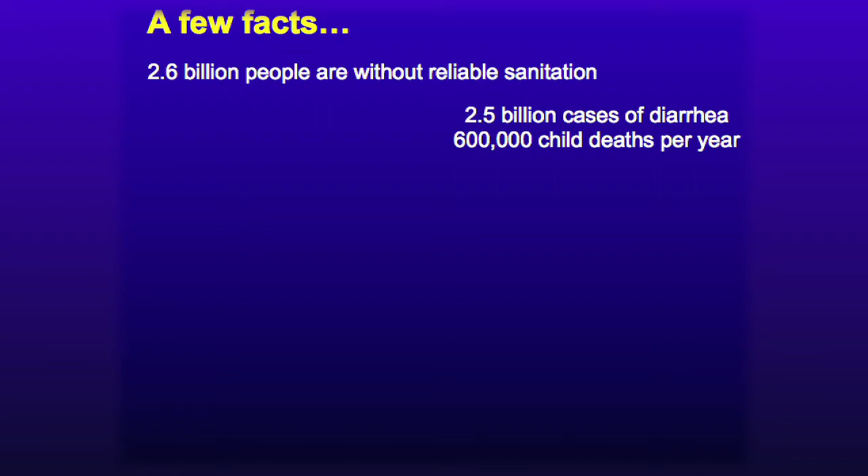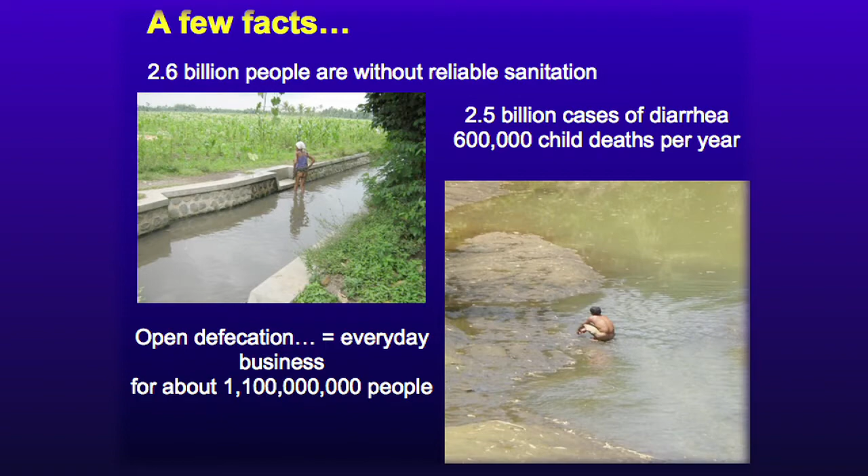All right. That is roughly 2 out of 7. And those standing would be representing the population that has no access to decent sanitation. That means you have no decent toilet to go to. And now I'm going to ask the fourth row to sit down. And the lucky ones in the second row have no toilet at all. That means that when nature calls, you have to go out in the bushes, you practice open defecation. And that's the reality for about 1 billion people on this planet. Over 40% of the population in India is practicing open defecation.

So now you can sit and relax. Everyone has nice toilets. And for the next 20 minutes, I'm going to tell you a little bit about the problem and about what we're doing, what kind of research we're doing in my lab and out in the field with graduate students, with undergraduate students, with researchers, and how we're trying to make a difference, how we're trying to solve this important problem.

It's a very important problem in the sense that it has a huge environmental and health cost. As you can see on my slide there's over 2 billion cases of diarrheal diseases each year caused by this eternal cycle of pathogen release from fecal matter and being ingested. It has a big cost on children. Over 600,000 children die each year from diarrheal disease.

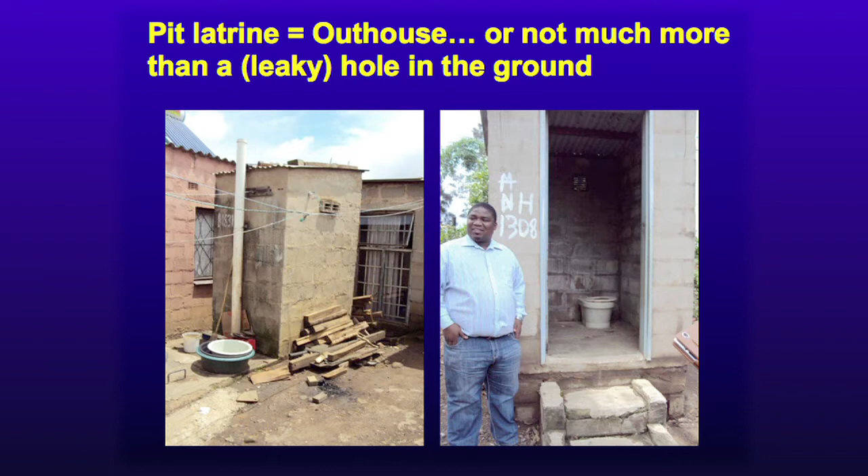When you have access to some sanitation, well, it could be something like pit latrines. And these are pictures I took in South Africa in a middle-class neighborhood, and this is kind of an inner court with multiple houses, and this is their pit latrine. It's the outhouse, and you can see here they're actually cleaning the dishes. The toilet is actually quite clean, but all the waste goes into a hole, and we're going to zoom in on this area here, which is where the waste is being received.

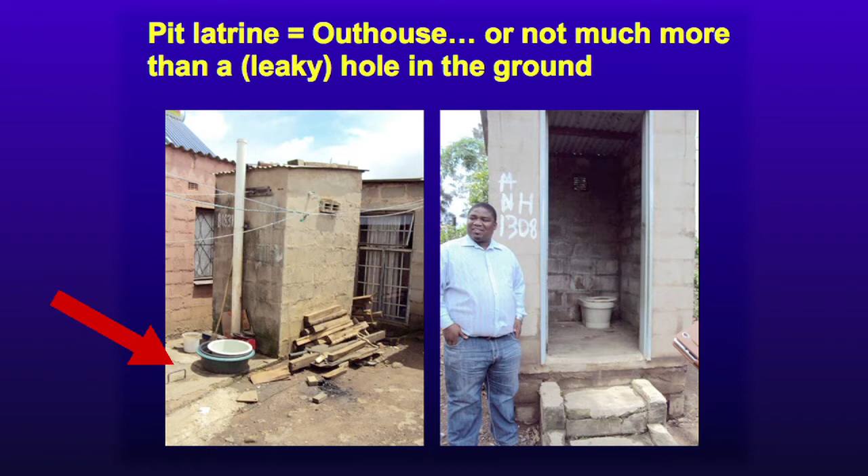And so what do you do when the pit is full? Well, that's all the waste here, and there are people whose business is to go and take the waste out and dump it somewhere. Often the work is done manually with buckets, and they're carrying those through the houses into the street, into narrow streets, and putting it in big drums and moving them. And of course it spills, it stinks, it's filthy, it attracts flies, and really spreads pathogens which are then going to infect people.

It's really intolerable. Really here, the Gates Foundation, led by Bill and Melinda Gates, and you might know that Melinda is an alumna from Duke, has championed a program which is looking at this problem and trying to find solutions. It's called the Reinvent the Toilet program, and I'm lucky enough to have 2 grants from the foundation, and we're funding graduate student, undergraduate student researchers to find solutions to this problem.

What they said is that it's not conceivable that for these 2 billion people, we have flush toilets the same way we have it in the United States or in developed countries, because there's just not enough water for having flush toilets for everyone. It consumes too much energy, and there's a need for too much infrastructure to have kind of the sewer and sanitation systems that we have in developed countries. So let's reinvent the toilet.

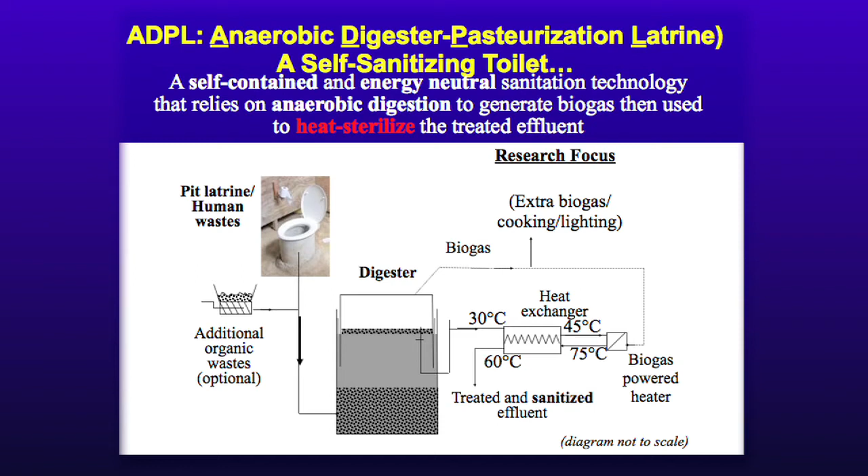And what we're doing is we are burning the biogas in a very efficient heater and heat exchanger system that we designed, and that allows us to take the effluent waste and bring it to temperatures where the pathogens are killed. So we're pasteurizing the effluent. So a few pictures here of how it looks in the lab. This is our first prototype, designed out of plexiglass. We built it in-house. You can see some pipes for the waste in and out.

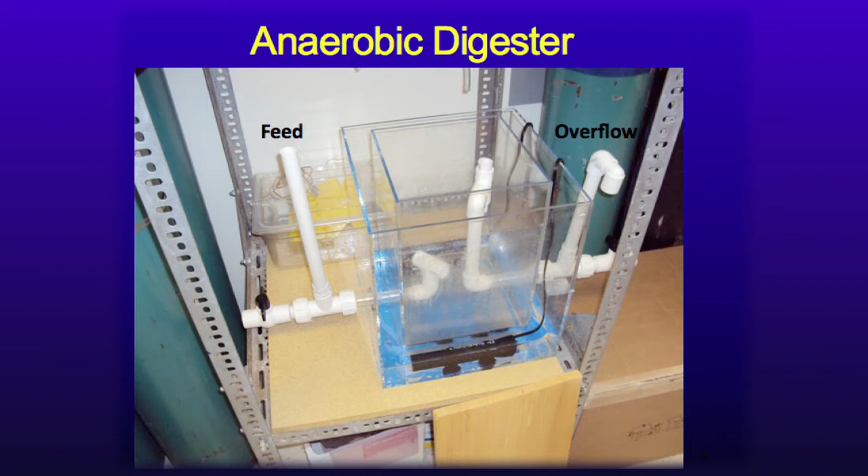It should be very simple. Remember that we're looking at populations that may be off the grid, so there's no moving parts. There's nothing sophisticated in there so that it can operate reliably. These are pictures of the digester as it is completed. This, by the way, is our synthetic poop. Always makes people laugh a lot, but it's a paste that has the same properties as fecal matter. It's a lot easier to work with that than with real waste in the lab. It's safer too. The biogas accumulates in the lid.

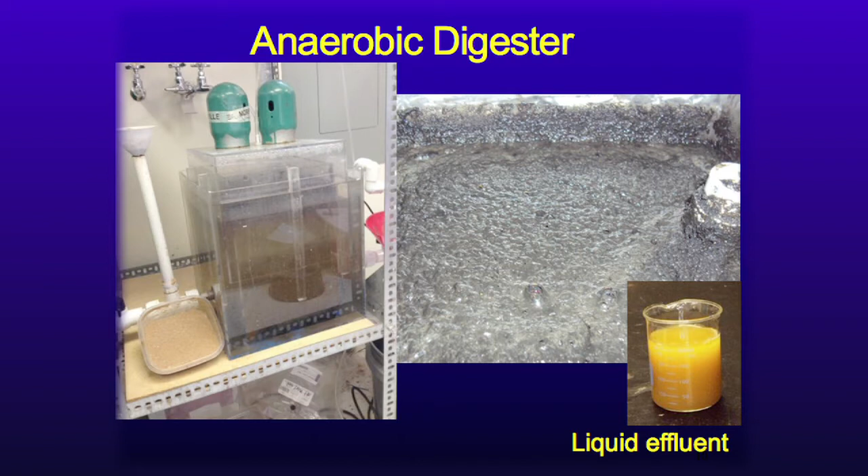This is a floating dome digester, just a little bit of jargon. Here you can see what the contents of the digester look like. You can see some gas bubbles. This is what comes out. This is the treated effluent. It's by no means clean water. We're not trying to make clean water. We're trying to make something that is safe. And this has gone through our heating system, has been pasteurized, and so we don't have parasitic eggs or viruses that are harmful. They've been killed over here.

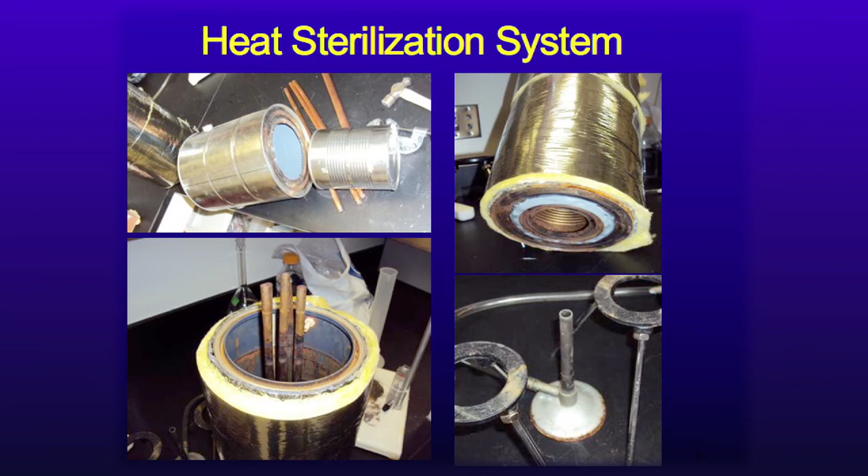You may be familiar with growing microorganisms on the plate. We're testing our heater and heat exchanger in the lab. We're feeding it some synthetic waste with bacteria, and you can see here we have 100 million in the inlet. Somewhere halfway through the system, we've killed a good portion of it, and what comes out is void of bacteria.

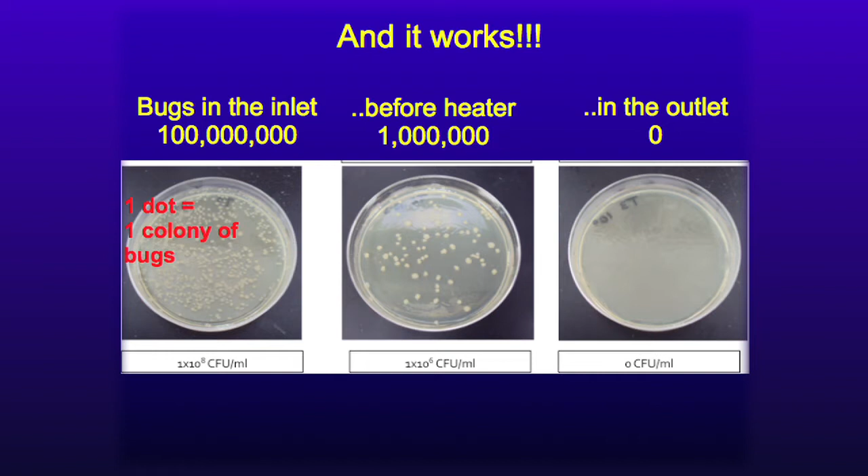So we're doing this kind of experiment to show it works and understand under which conditions it works and improve our understanding of the design and operation. We're moving these innovations to the field because this is where it's going to make a difference on the lives of people. And so last year, I had a graduate student spend the summer in Kenya.

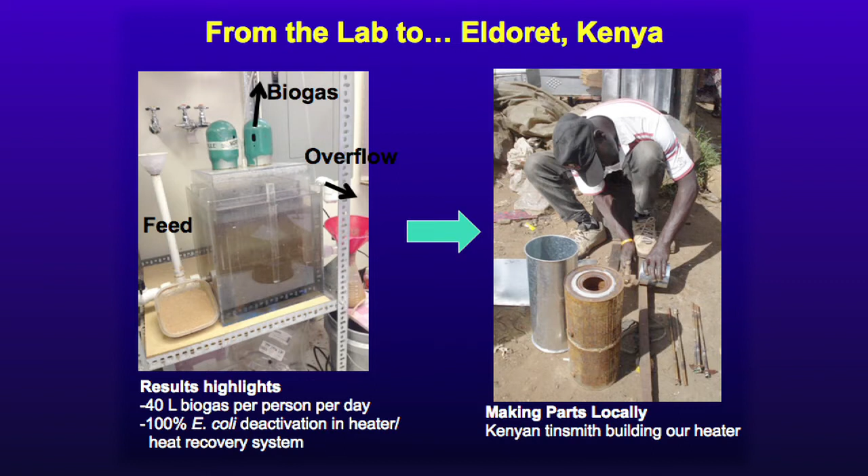And essentially, here you can see a tinsmith, which is replicating our system. This is the heater that I showed you earlier. We're building with local materials, we're building systems. And we built 3 such systems. The structure has elevated toilets. It has 3 toilets so that it gravity feeds into the digester. Here is a digester, and this is our heat exchanger, and this is the heater.

And so we have 3 locations that we're testing. We're educating the people who are using it, and we're acquiring data to see how well it works in the field. And what we found is that the people are very interested in those systems. They're excited about the biogas. They're excited about the possibility of having liquid effluent as fertilizer.

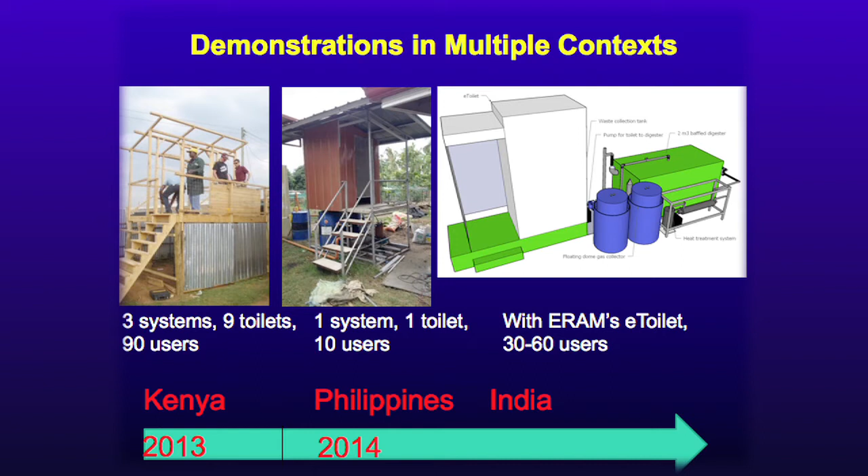And we're testing the systems in multiple contexts because the problem is so huge that we need to understand the spectrum of conditions for which it might be applied. So we have a partnership with some folks in the Philippines. And then we're also in India, and this is a CAD drawing of a system that we have there. We have partnered with a company that designs high-tech toilets that clean themselves, and then we're providing the treatment at the tail end.

And so you'll ask me, okay, where's the engineering in all that? What sort of things do we do with my students? So here are a few examples really quickly. This is the heat exchanger, and we are applying concepts of heat, momentum, and mass transfer to fully understand the flow of materials and the transfer of heat. And that allows us to optimize the design. And then we can size it, we can optimize the energy efficiency.

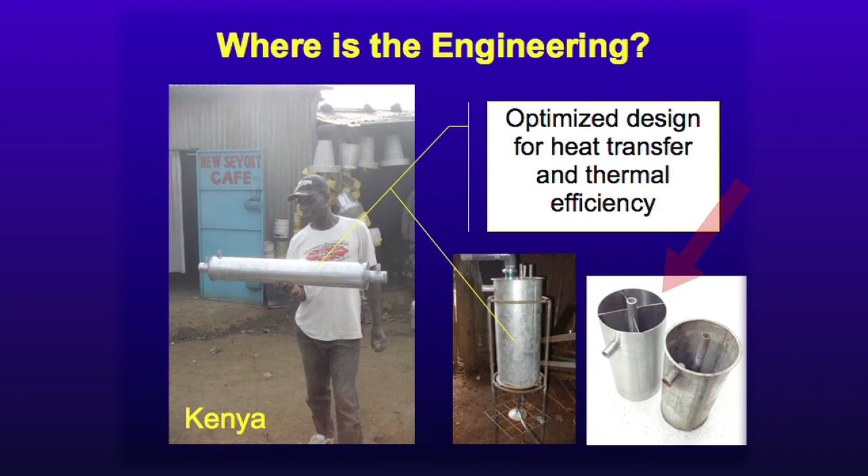These are heaters, and you can see this one has baffles in there, and that allows us to increase the pathogen killing in the heater. And as you can imagine, the system is very cheap. You know, this is a few $100s, and probably we got a street price for tourists in Kenya there.

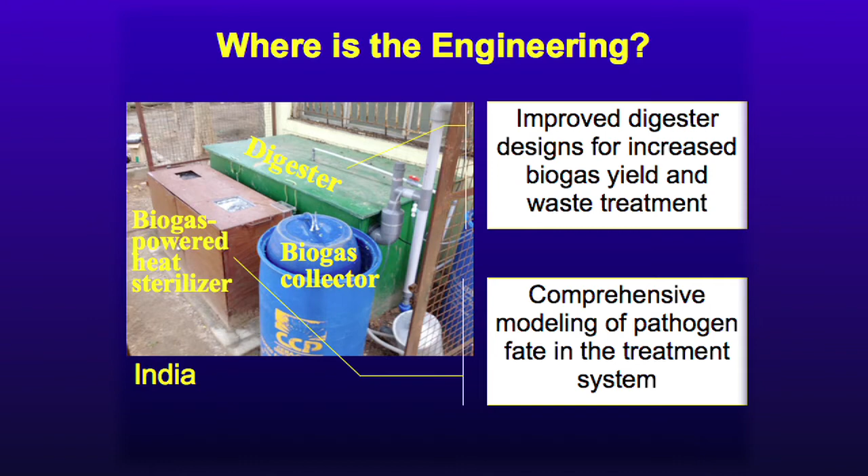So this is a system in India with the self-cleaning toilets over there, and we're designing new digesters. I have a picture in a minute showing you that how we configure the anaerobic digester allows us to increase the production of biogas and therefore also increase the waste treatment. We're also completely modeling the fate of the pathogen, because ultimately the main goal here is to kill all the pathogens. So we are doing comprehensive modeling to allow us to optimize the design.

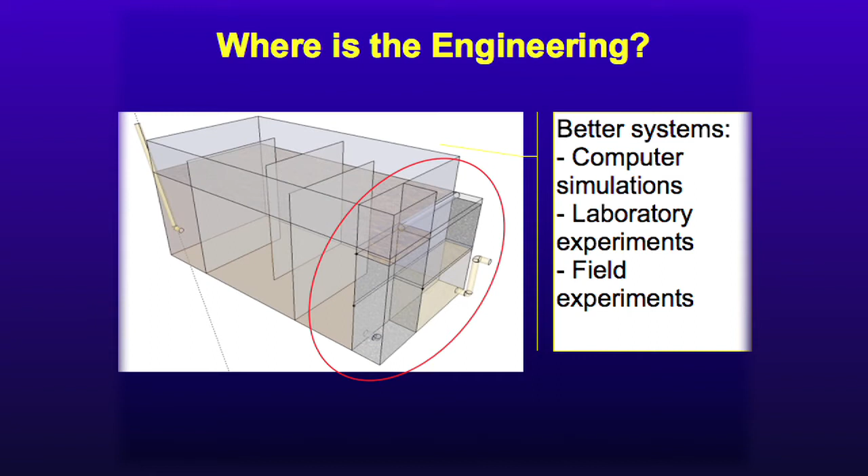This is just an example of this digester with baffles, and we are conceiving post-treatments that will take the waste that I showed you earlier, that I said is kind of a brew, and maybe in some cases you would want to have clear water so that you can flush the toilet, and that system, if successful, might do that. And we're following various steps, starting with computer simulations, injecting fundamentals of engineering, following then with lab experiments, and then we're taking these results into the field.

We're also using low-cost microcontrollers, little Arduino chips that cost close to nothing, to control our system. So we're injecting high-tech into low-tech systems, and that allows us to better operate those systems. As researchers, we're also able to acquire data and see how our units are doing in the field.

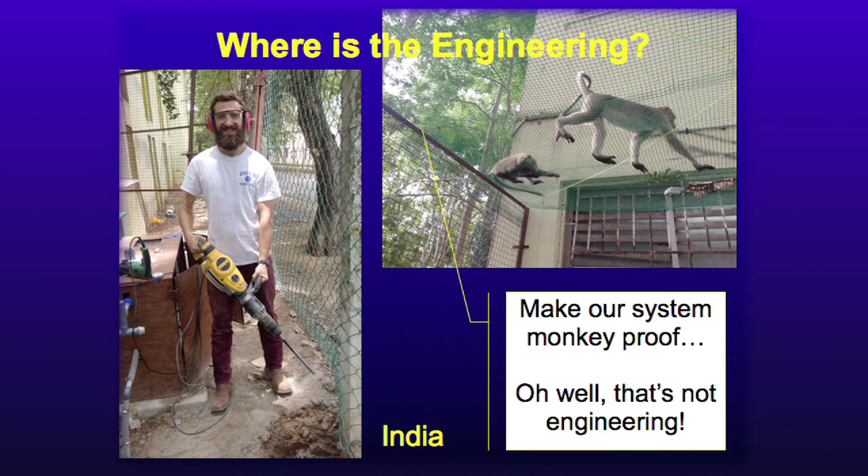In the last 5 minutes, what I want to tell you about is our second project. And this is a high-tech approach, maybe more science fiction, but actually it's not too far-fetched. This system is different. We call it an Omniprocessor for human waste. And the idea is that maybe in the urban poor, it would be very concentrated.

You would need a treatment centralized and being able to take care of the waste. And this is what it's doing. And how is it doing? It's using supercritical water oxidation. I'll tell you in a minute what it is. The unit is to be housed in a 20-foot container that we have designed, and we're constructing it right now, and it's going to be operating in a couple months.

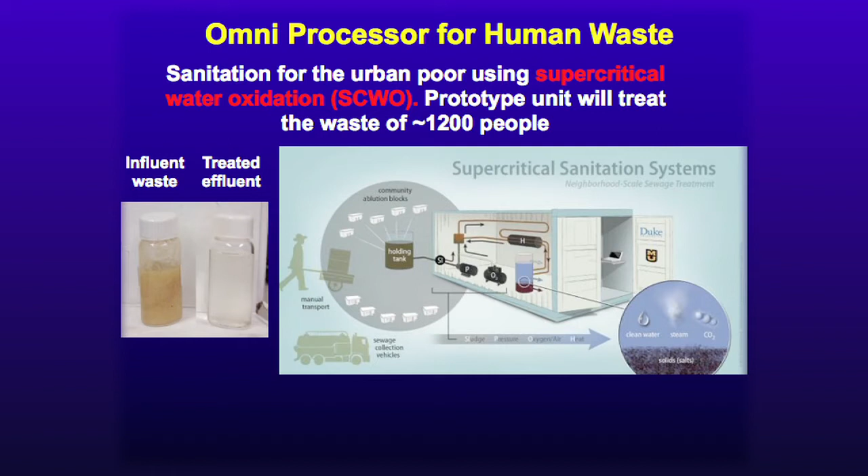And as you can see here, this is the vision where it would be a centralized treatment receiving the fecal waste, either through pipes or those transporters that we're dumping into the river, or motorized transporter, and we're turning the waste into clean water. So what you see here on the left side is our simulant waste, and this is a picture of the treated waste from our lab unit. And that water is clear. That water is odorless. We're not trying to make drinking water, but you could drink it.

In fact, I've vowed that I will drink the water coming out of our unit just for shows, and I will put it on YouTube, so stay tuned. There are, of course, psychological barriers in turning poop into drinking water. So, some people would object, and I'm not going to comment on that. So, I'm thinking more like shower to flower. Maybe we can turn that into irrigation.

We are going to produce a lot of hot water, and people can do laundry. There's value, and we are having part of our team also looking at how this integrates into the value chain. We're looking not just at engineering, but we're teaming up with professors in other schools within Duke to look at these aspects of the problem.

So how does it work? Supercritical water is a pressure cooker on steroids. This is your pressure cooker, by the way. There's 100 degrees C in 1 atmosphere, slightly higher. And this actually is not to scale, so it doesn't fully convey the fact that you're increasing the pressure to 220 times the atmospheric pressure, and you're raising the temperature to something like 370 degrees C, and you enter this zone which is supercritical. It's not a gas, it's not a liquid.

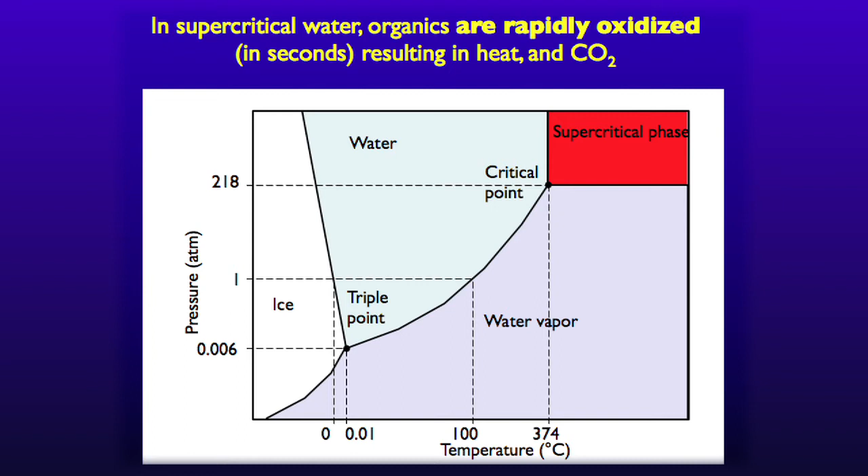Show you some pictures here. That's our container. Actually, if you walk from here to the LSRC, the Love Auditorium, you might see it. This is the inside, and you can see this giant coil here. This is a heat exchanger. A lot of the challenges is being able to recover all that heat. Remember that I told you one person, 25 watts. So 1,000 people that this unit can treat, you would have roughly 25 kilowatts. And the challenge is to be able to treat the waste with those 25 kilowatts, or maybe recover some of that energy. And we know that we are going to recover a lot of that energy as heat and hot water.

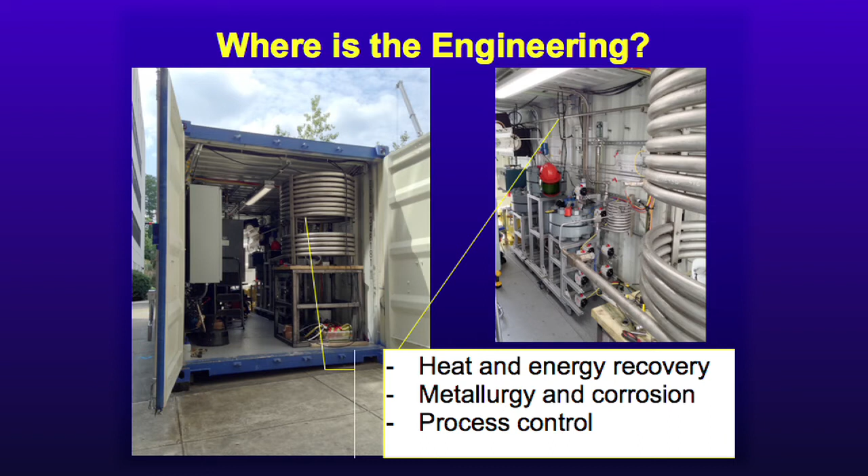So where are the challenges? Well, heat and energy recovery. This is where we put our best engineering skills to make sure that we can recover that heat, the heat of the combustion. This is really cool, actually, to think that we're burning stuff in water in that supercritical water phase. There's some real challenges because at those high temperatures and high pressures in the presence of oxygen, metal corrodes, and we're using the latest alloys, and there's some real issues on process control.

Also working in a lab, here, just with some pictures showing you that depending on how much excess oxygen we put in the system, you see different degrees of waste conversion. And again, that water treated here, it might have a slight color, but it's really odorless and it's quite clean.

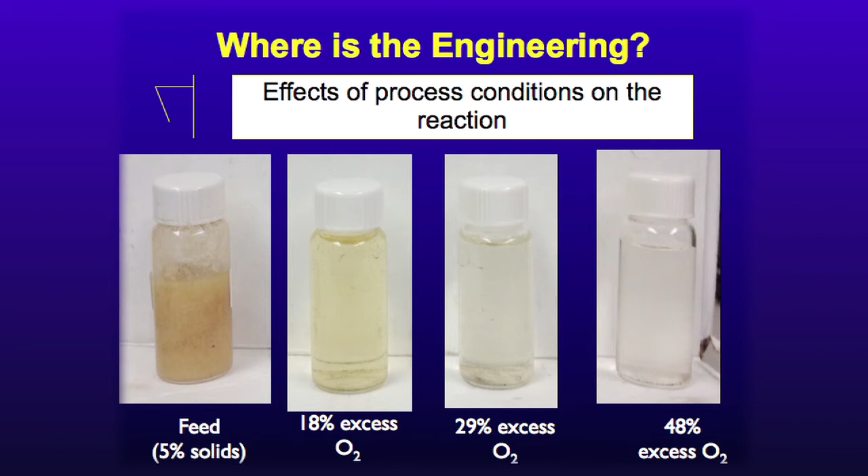So that's, in a very short time, kind of a highlight of these two projects, to draw the attention on a very important problem, which is the lack of sanitation. We're working towards improving lives. We're working towards finding good solutions. But the problem is a very, very big, very important problem. It's very clear that there's not a silver bullet. It's going to be a multiple of solutions. And it's probably going to have a portfolio of technologies depending on the geographic location and whether it's a rural or urban setting.

And what makes it really interesting and also challenging is all the other factors that come into play. It's not just we need to come up with a better mousetrap. We need to make sure that it's integrated, that it's economical, and that people are going to adopt it. But personally, what I find is very rewarding because I know that down the road, this work will improve the lives of people who work in very dire situations.